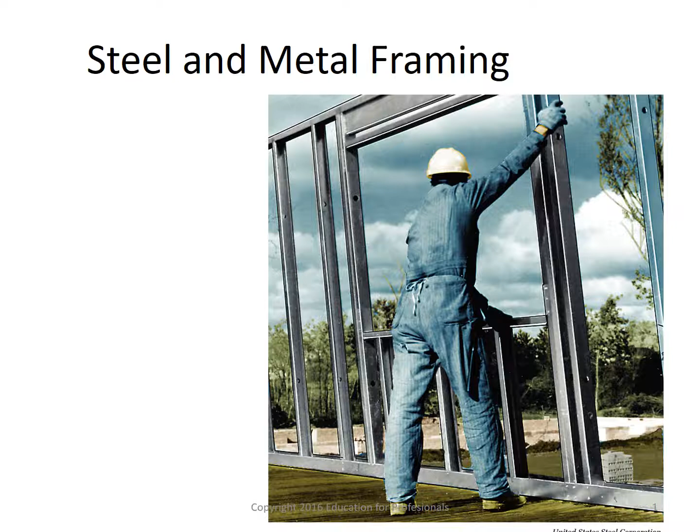Many metal framing methods are employed today. Light gauge steel construction is often called steel stick construction, since each wood framing member in a typical wood framed home assembly is replaced with a metal framing member. Another metal framing method, similar to light gauge steel construction, involves the use of heavier gauge and lighter gauge steel studs. The heavier gauge studs are placed 4 foot on center, with the lighter gauge members installed between the studs.

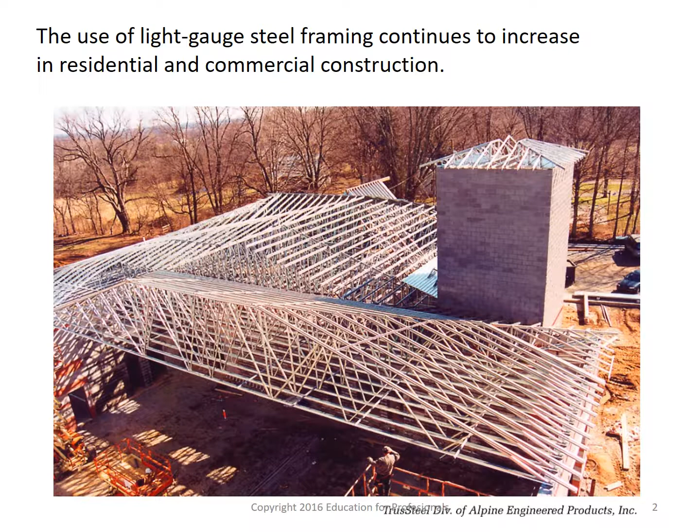The C-shape is the most common shape produced for light gauge steel framing and is used for studs and joists. C-shaped members consist of a web, flange, and a lip. Web depths range from 1 and 5/8 inches thick wall studs to 12 inches. The flanges stiffen the web and provide surfaces for attaching sheathing and gypsum board. The lips extend from the flanges on the open side and stiffen the flanges.

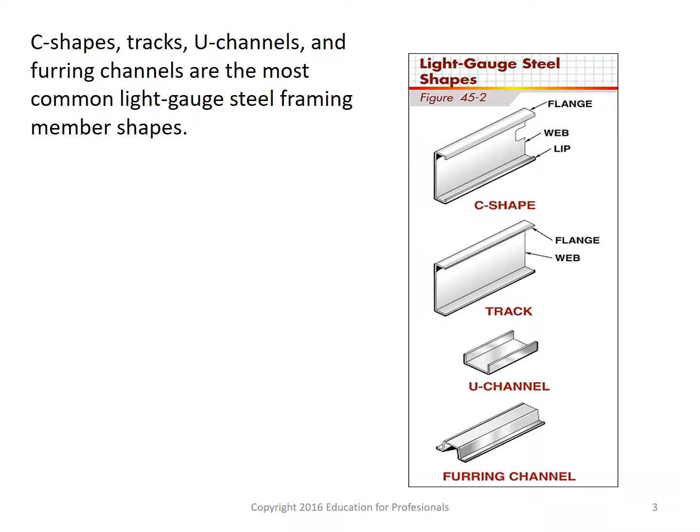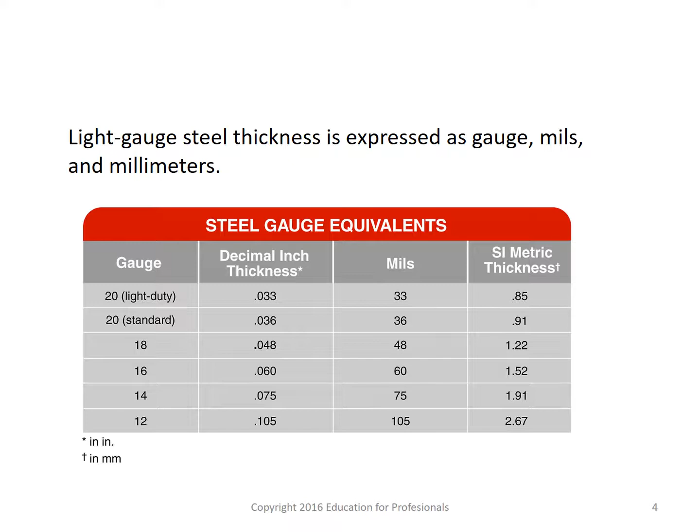The term gauge traditionally has been the unit of measure for identifying sheet steel thicknesses. The higher the gauge number, the thinner the steel. Steel thicknesses have also traditionally been given on prints as mils. A mil is equal to 1/1000th of an inch. Metric dimensions in millimeters are increasingly being used to express steel thickness. 1 millimeter is equal to 0.001 of a meter. The table in figure 45-3 provides gauge dimensions and their decimal, inch, mil, and SI metric equivalents.

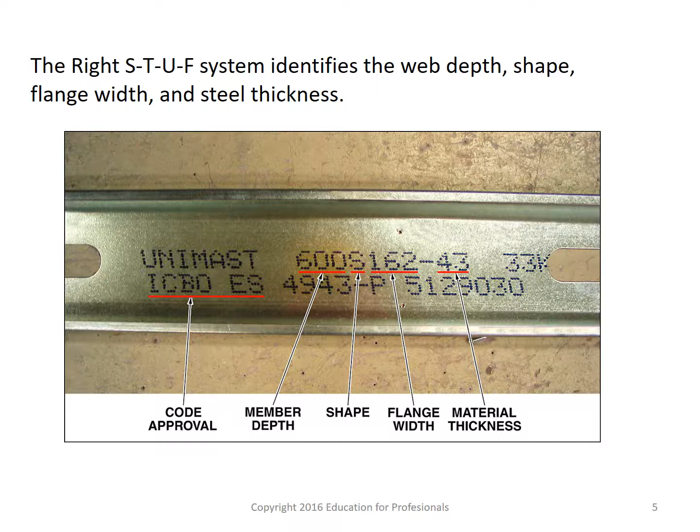When using the STUF system, the web depth and flange width are expressed in hundredths of an inch. For example, the web depth for a stud with a 6 inch depth is expressed as 600, since 6 inches times 100 equals 600. The flange width for a stud with a 1 5/8 inch flange is expressed as 162, since 1 5/8 equals 1.625 inches, and 1.62 times 100 equals 162. That's where they come up with the 162 number. So the steel thickness of a light gauge steel framing member is the thickness of the base metal in mils before being galvanized.

Self-tapping screws are used to fasten metal members to each other and to fasten other materials to framing members. As the name implies, self-tapping screws cut their own threads as they are being driven into the metal framing members. Self-tapping screws include self-drilling and self-piercing screws. The self-piercing type actually doesn't tap the same way as the self-drilling type.

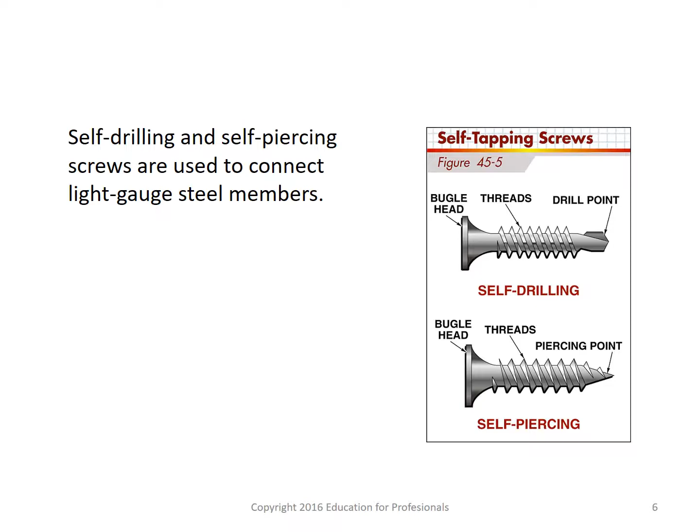A variety of screw head types are available for different operations. See figure 45-6 for the various different types. You have screws with pan heads, hex washer, or pancake heads, which are recommended for fastening steel to steel. There are a few common types that are predominantly in use, while some are lesser found. It depends—if the gauge of the metal is a thicker type, a lower gauge, then sometimes you have to use different types of screws.

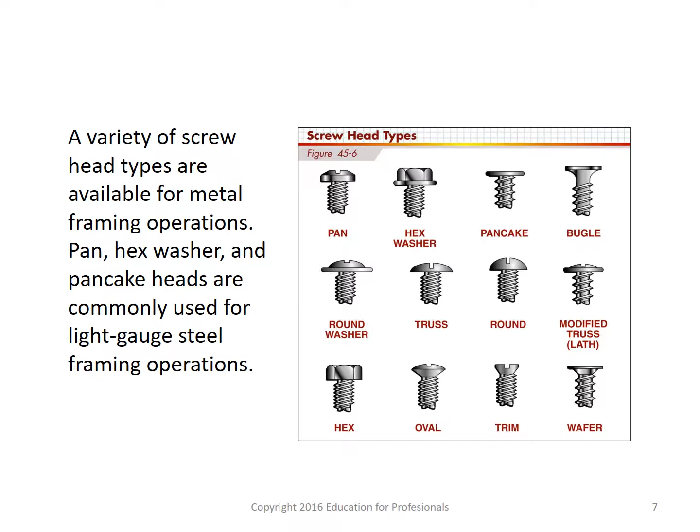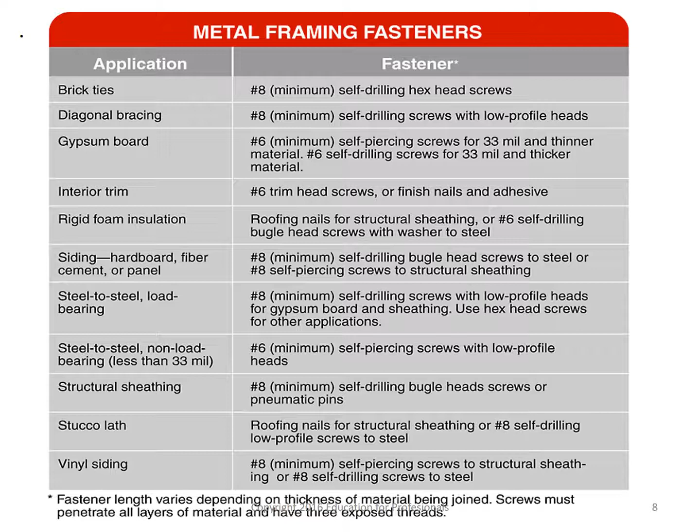Drive pins are made of heat-treated, high-carbon steel that produces a very hard fastener. Drive pins have spiral grooves or knurls on the shanks to draw the pins tight when driven. As the pin is driven, the point penetrates the sheathing and bores through the steel. This action pushes the steel outward away from the pin. The steel then compresses and grips the pin.

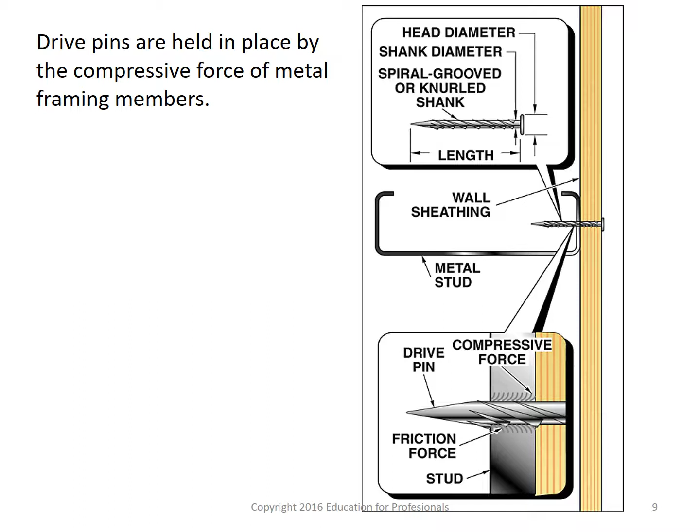Welding can be used to prefabricate wall sections as well. Most often, wall sections are welded in a shop rather than on the job site. Welding must be performed by certified welders and according to the American Iron and Steel Institute specifications, AISI.

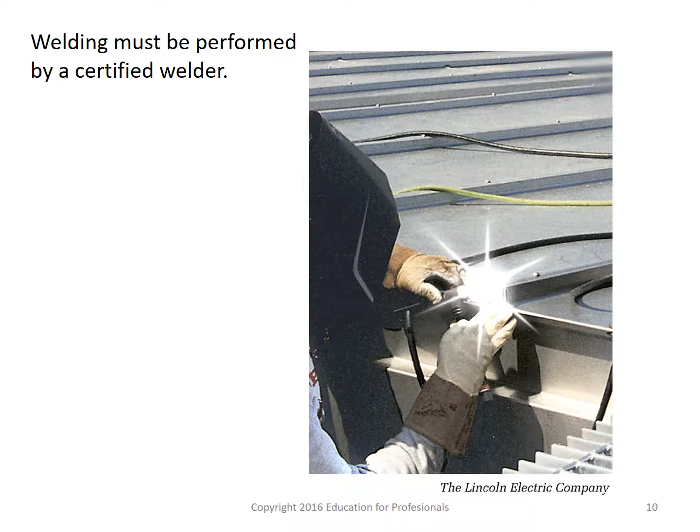Spot clinching is a method for joining two metal framing members that provides a strong connection without the use of mechanical fasteners. In the process, a pneumatic clincher presses a section of one framing member into the adjoining member, leaving a button or stitch indentation. Spot clinching is currently approved by the International Conference of Building Officials, but has yet to be approved by other code organizations.

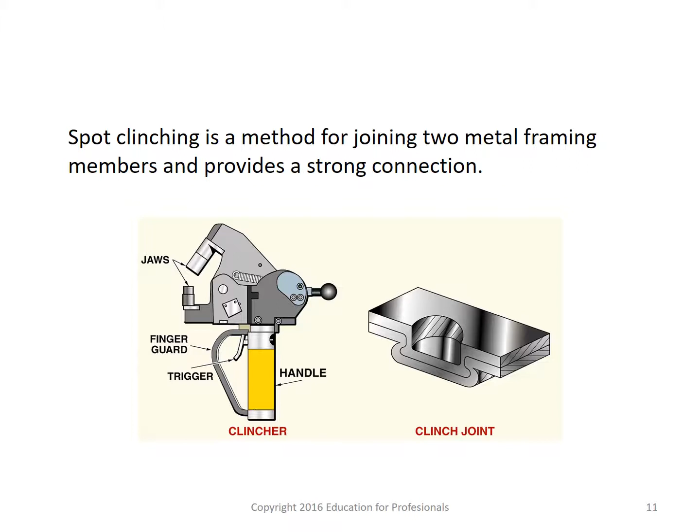A drywall screwdriver is often used to fasten metal framing members together and to fasten panel sheathing or gypsum board to metal framing members. The nose piece on the drywall screwdriver controls the depth to which the screw is driven and prevents screws from going through the panel or gypsum board.

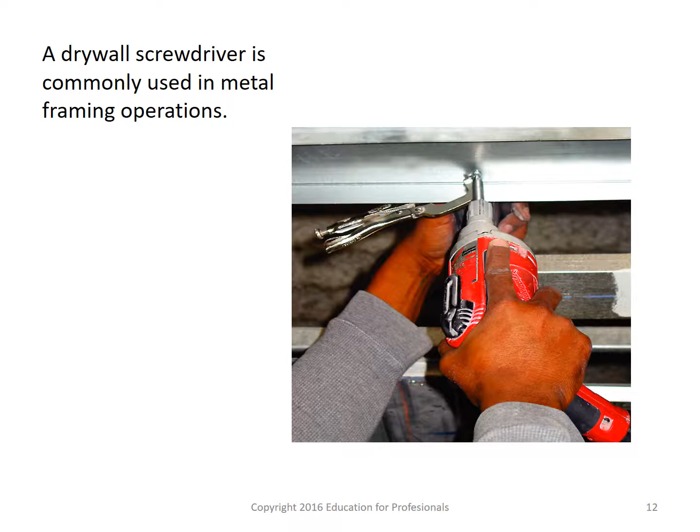Pneumatic steel framing tools, or pin guns, are used to install drive pins. They operate on air pressure ranging from 90 to 120 psi, and the pressure required depends on the steel thickness. These tools have a safety contact to prevent firing unless the trigger is pressed and the tool is firmly against a work surface. An overdrive control mechanism prevents overdriving of the pins. The air compressor line pressure must also be adjusted to the proper setting for the steel being fastened, as too low pressure will result in pin failure.

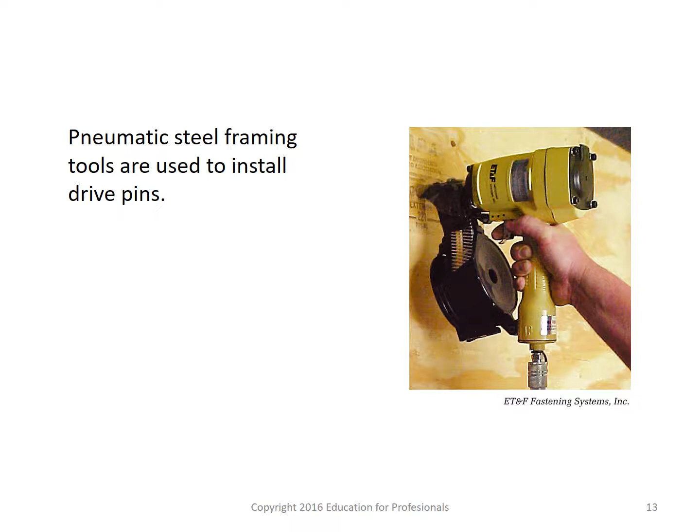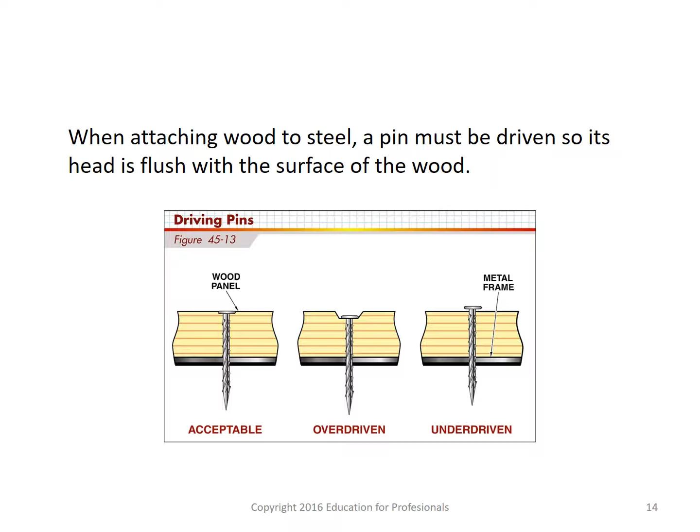A drive pin should be driven so its head is flush with the panel surface. As you see on the far left, that's good. Overdriven, too deep below the surface, weakens the bond, and underdriven has the same effect, also weakening the bond. It also leaves an amount exposed that can get in the way of other items.

An abrasive cutoff saw, or chop saw, is a power tool used to cut metal framing members. Unlike power miter saws, abrasive cutoff saw blades cannot be rotated from side to side for angle cuts. Instead, the saw fence is adjusted from side to side for angle cuts. An abrasive cutoff saw is equipped with an abrasive blade.

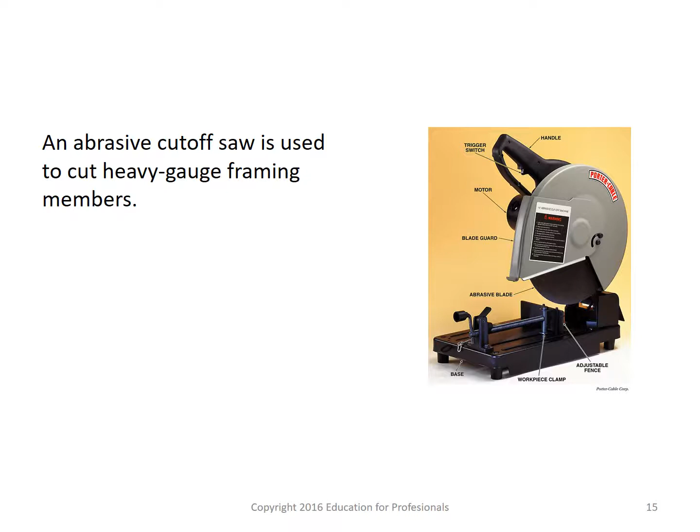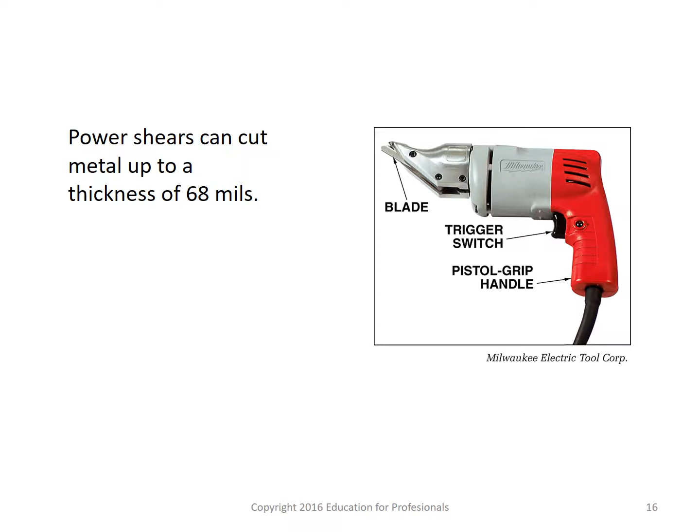These saws are used for heavier gauge steel studs, the commercial type, which are often too heavy a gauge to be cut even with hand snips. But there are other alternatives. Here's one: handheld power shears, which can cut metal generally up to about 68 mils.

Another method is plasma arc cutting, an electric arc cutting process in which metal is cut by melting a portion of it and blowing the molten metal away with a stream of heated, high-velocity ionized gas. Plasma cutting is used when a large number of metal framing members must be cut, usually done on a CNC type setup in a factory, for prefabrication methods.

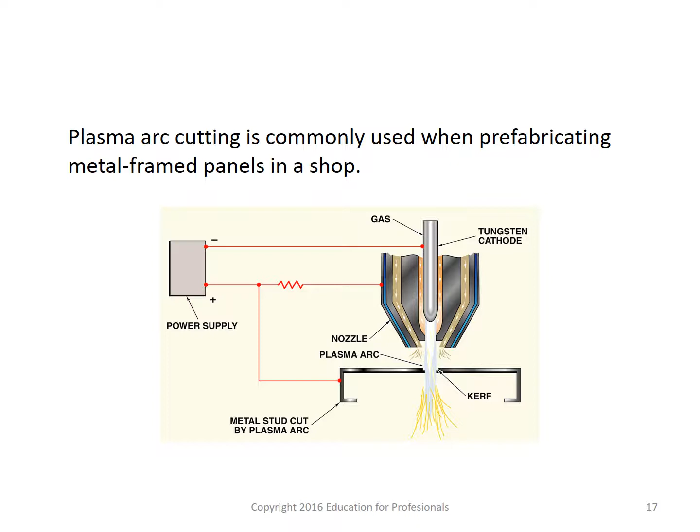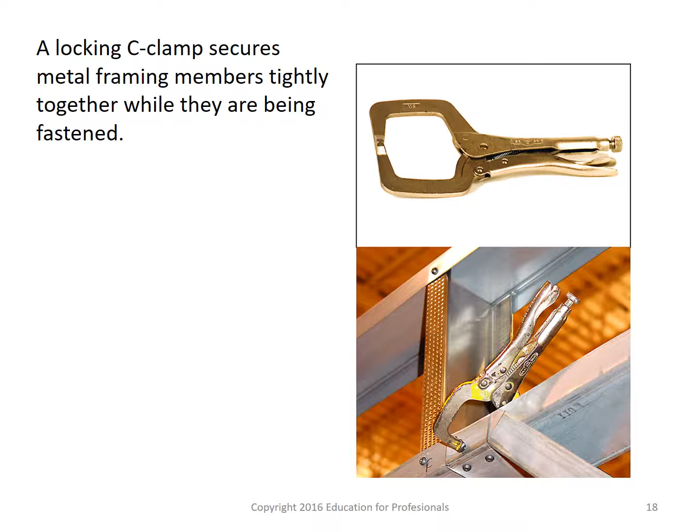Another common tool is the locking C-clamp, which secures metal framing members tightly together while they're being fastened. The metal can be a little slippery sitting in the C-channel track, especially studs, so when driving a screw between the track and the stud, it's much easier to put a C-clamp on and hold it tight so it doesn't move. It's also safer, because if you slip with a screw gun, it's easy to get hand damage, or even fall off a ladder given the force needed to drive that screw.

Load-bearing C-shaped steel joists are available in sizes comparable to wood joists, ranging from 2x6s to 2x14s. Metal stud framing is pretty much lockstep with wood framing as far as sizes go. Notice that first size, 1 5/8 — that would be the size. Say you're using a 1x2 for some reason; the actual size of a 1x2 is not 2 inches on that dimension, it's 1 5/8. The idea behind mirroring these dimensions is to keep everything consistent with wood construction.

Joist thicknesses and sizes are determined by the live and dead loads the floor must support over its unsupported span, the same as with wood, where span tables and charts are used for figuring allowable spans. Openings are provided in the webs for utilities such as electrical wiring or plumbing, meaning holes are cut to allow wiring through, similar to drilling floor joists or studs, but these openings are already there and quite handy. Floor joists should be positioned so openings are at least 12 inches from any bearing points, and the outer ends of the joists are attached by metal angles to a rim track, which serves the same purpose as a header joist in wood frame construction.

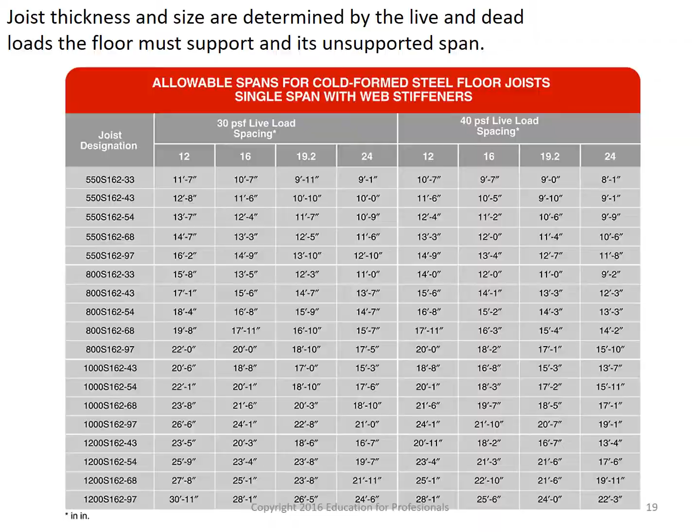Here, the main components of a metal frame floor are shown: the joists, the rim track, cross bridging, and blocking. These ensure framing components are installed in the same direction so that cutouts align to allow for easy installation of utilities. Keeping all those cutouts in a row is important. If you're running a straight pipe through this, you can't have those cutouts jogging to the left and right. The same goes for steel studs in a wall situation.

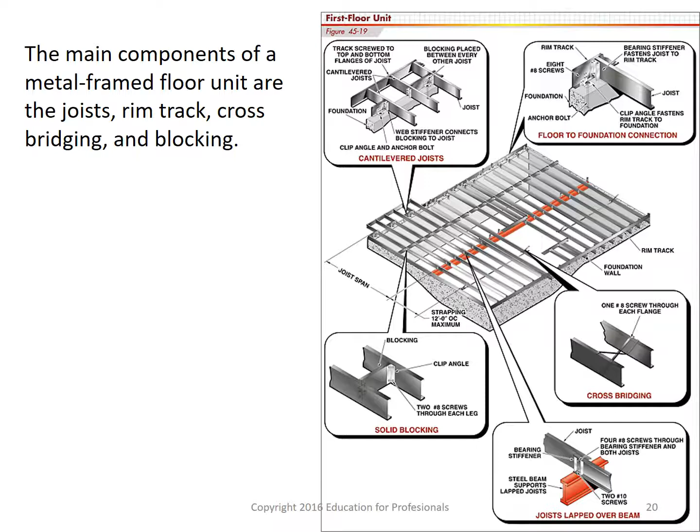This figure shows a framed floor unit over a full basement foundation, where the rim track is directly fastened to the foundation with clip angles. One part of the clip angle is secured to the foundation wall using an anchor bolt, and the other part is secured to the rim track with screws. Bearing stiffeners tie together the ends of the joists and the rim track.

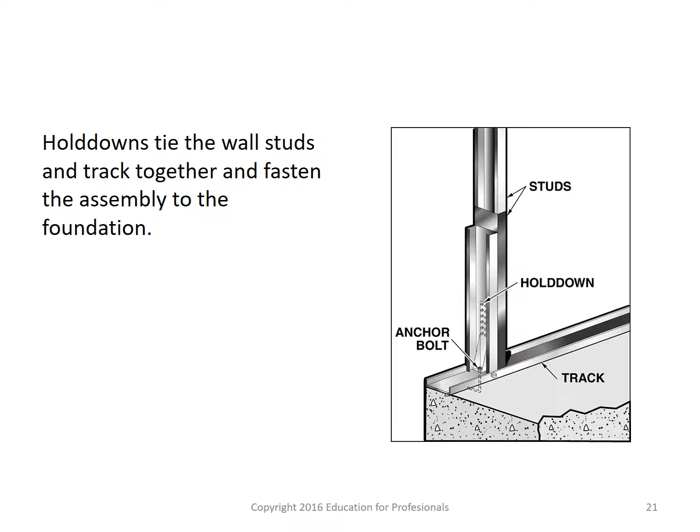In hurricane and seismic areas, hold downs may be required to tie down the wall studs and track together and fasten the assembly to the foundation.

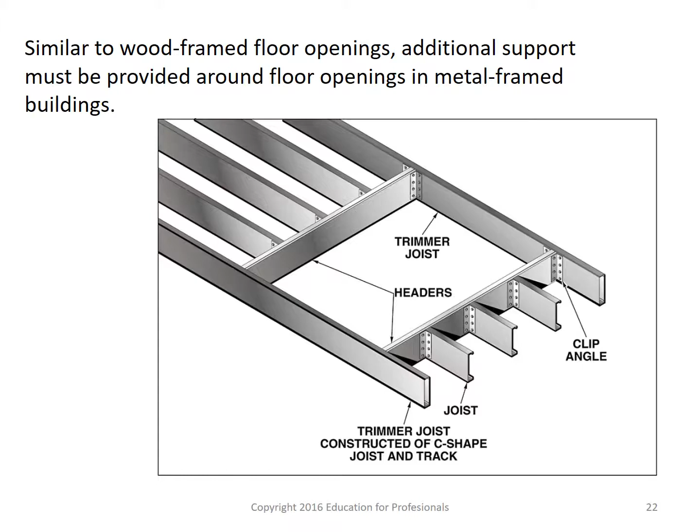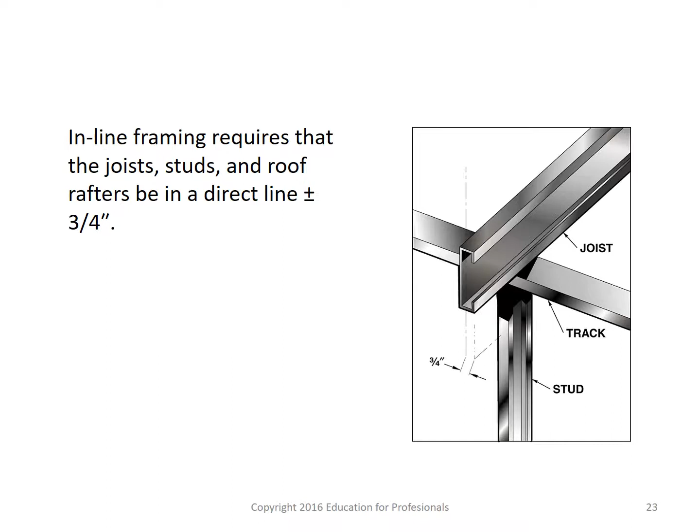A maximum variance of 3/4 inch on either side of the center line is allowed. However, unlike the double top plates of a wood frame building, the horizontal tracks of a metal frame wall cannot adequately support weight between the spans of the studs or joists. The metal framing is often lightweight enough that it's not meant to carry a joist if it was off the stud to the left or right by more than that 3/4 inch amount.

Top and bottom tracks are comparable to the top and bottom plates of wood frame construction, and the tracks consist of a web and two flanges. The web width of a track must be equal to the web width of the studs. Track flanges may be bent slightly inward to ensure a tight fit between the track and the studs. The studs are placed at an angle between the track flanges and turned so they are perpendicular to the track.

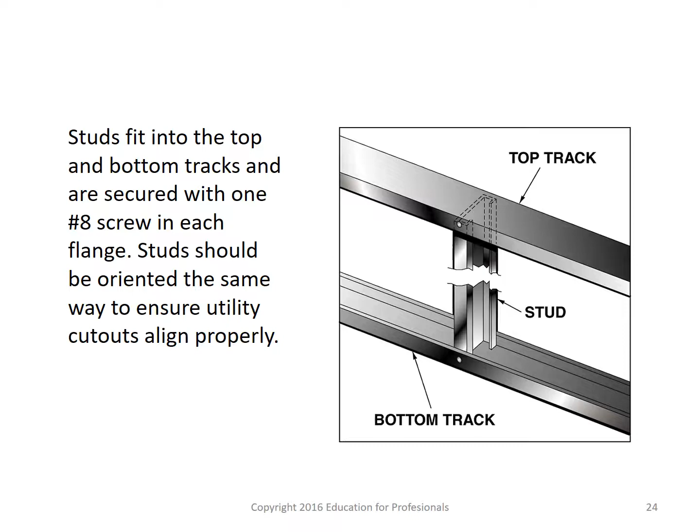Anchor bolts are commonly used to secure the bottom tracks of load-bearing exterior walls to concrete slabs or foundations. Bottom tracks must be reinforced with a washer, hold-down bracket, or plate to ensure a proper connection, since they're simply too thin. In the old days, we even used powder actuated fasteners, but a little bit of upward force and they just rip right through that metal bottom track—that's the reason for putting a washer as well.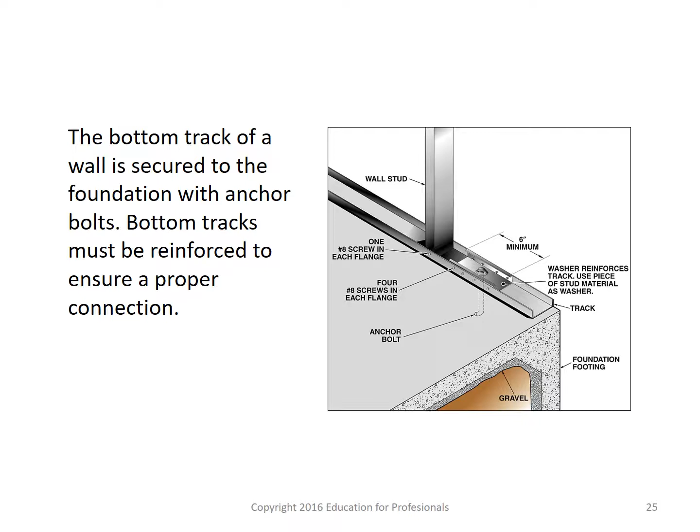Anchor strips and mushroom spikes may also be used to secure the bottom tracks in position. Powder actuated fasteners now should not be used to permanently anchor bottom plates to slabs or foundation walls, so that's pretty much out.

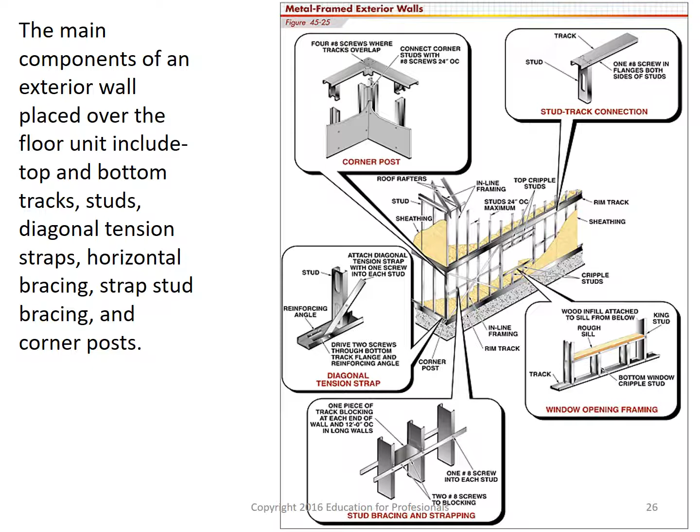A first floor exterior wall placed over the floor joist and subfloor is shown in this figure. Note the inline framing of the studs directly above the joists. The wall includes a window opening with a header, sill plate, and top and bottom window cripple studs. Diagonal braces or tension straps are used to brace studs against lateral movement. An outside corner post and stud-to-track connections are identified there. Exterior walls are sheathed with APA rated structural panels, OSB, or plywood.

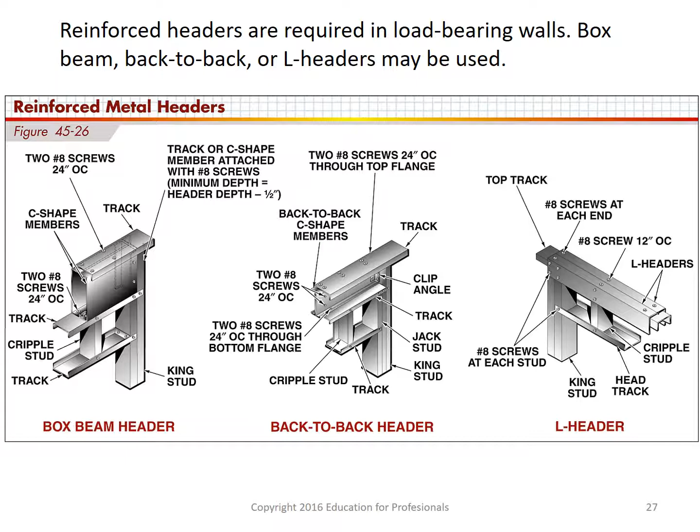Similar to wood frame construction, headers are installed above wall openings in exterior walls and interior load-bearing walls. Headers are formed with two equal-sized C-shaped framing members to make a box beam header or a back-to-back header, and may be constructed with one or two angle pieces that fit over the top track, which would be an L header. You can see in the drawings what a box beam looks like. The back-to-back header forms an I-beam, and the L header has track over the top and bottom. It's a little bit different.

Where a non-load-bearing wall intersects with a load-bearing wall, that's one type. There, a 6-inch or larger stud can be installed in the exterior wall, and the smaller stud is fastened back-to-back with the larger stud. Another method, similar to constructing inside corners for wood frame buildings, involves fastening two equal-sized studs back-to-back. Either of these applications are acceptable.

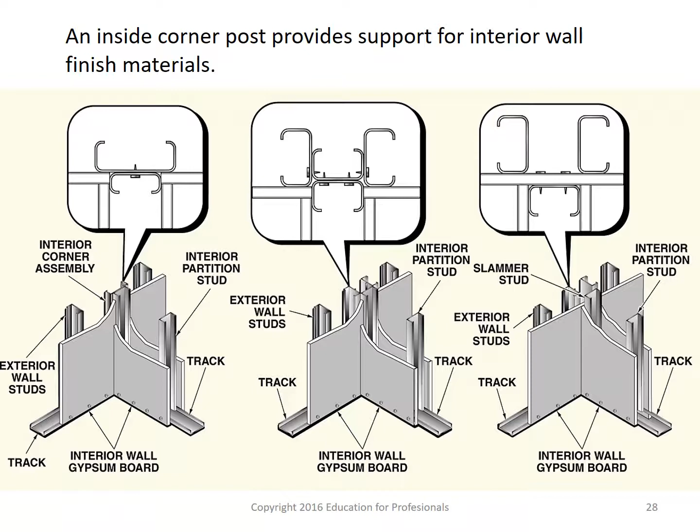Wall studs can be pre-cut to the proper length and delivered to the job site, or they can be cut on the job site with a chop saw.

The walls are framed on the subfloor or a separate panel table. A common wall framing procedure is as follows: lay out the walls on the subfloor or panel table in snap lines, cut the bottom and top tracks where it is necessary to splice them, insert a short piece of stud material and fasten to the tracks as shown in the figure. Position the tracks on edge next to each other and use a black felt tip marker to lay out the studs, usually 24 inches or 16 inches on center, marking the tracks using standard conventions.

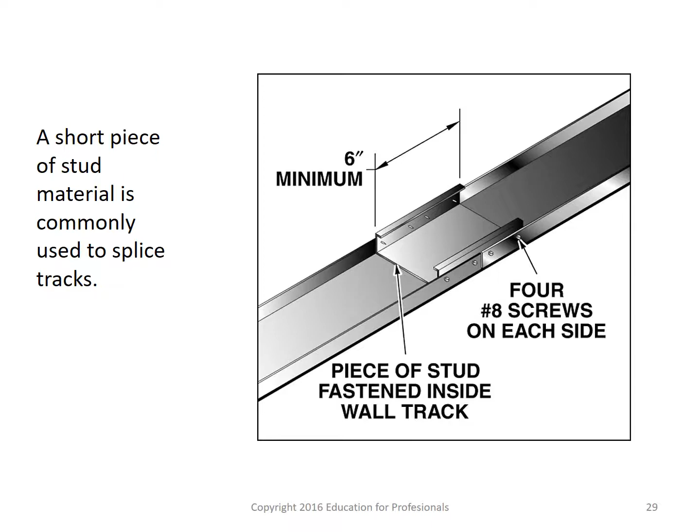A common procedure for raising and placing walls is this: measure the locations of foundation anchor bolts, transfer the measurements to the bottom tracks, and drill holes so the tracks fit over the bolts. Here you can see the other procedure is simply raising the wall into position and then placing it over the anchor bolts.

You should attach braces to the ends of the walls, about every 8 to 12 feet between the ends. Studs about 12 feet long work pretty well for braces. That's an angled brace that goes to the subfloor, if it's a wooden floor, and to the wall itself at the top near the headers. Nail wood blocks to the surface subfloor in a wooden situation.

For the concrete ones, we usually used a powder actuated tool, or else you could just bolt them down with an expanding bolt. The powder actuated tool can be a little iffy since high winds can rip them out, so you want to make sure the walls are anchored pretty well. Obviously, you don't want the walls toppling over due to some wind.

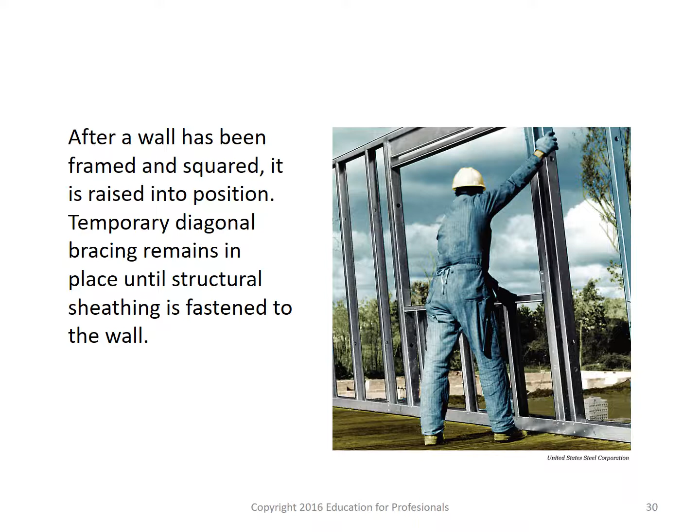For a multi-story building, the ceiling joists also serve as floor joists. The framing procedure, fasteners, and components are the same as those used for first floor joists. Ceiling joist bracing is fastened to the bottom of the joist where spans exceed 12 feet 0 inches.

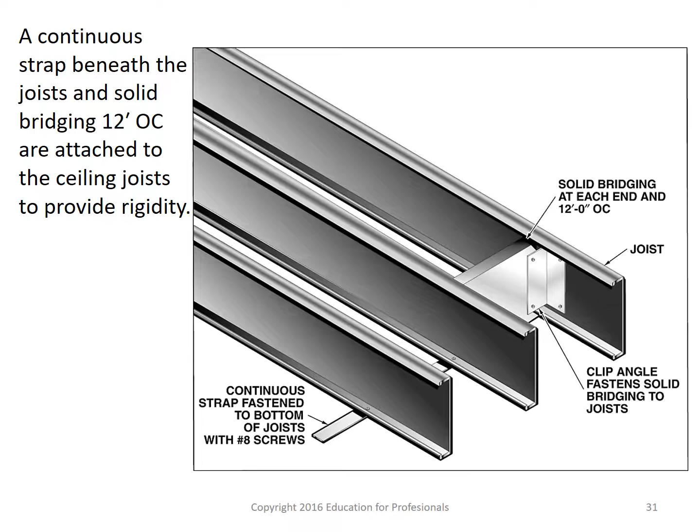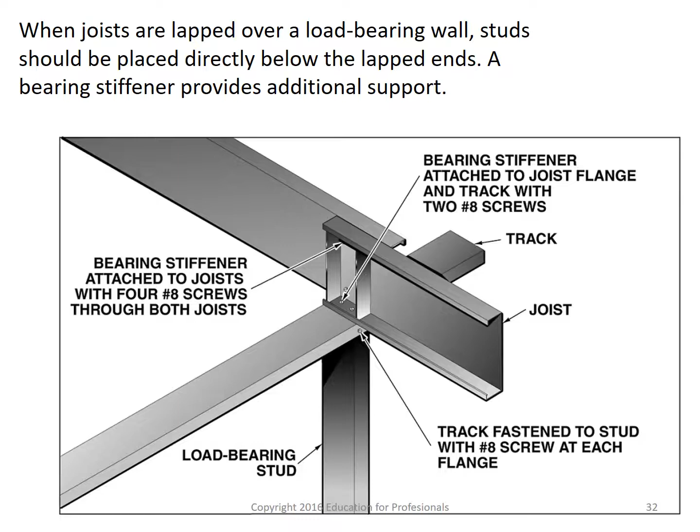Ceiling joists must be placed directly above and in line with the studs below. When joists are lapped over an interior load-bearing wall, the first floor wall studs will be directly under one of the lapped ends—take a look here in the figure. A bearing stiffener is used to secure the lapped ends in position.

For continuous span joists supported by a load-bearing wall, blocking is used at the midpoint, and the stud should be placed directly underneath. Where walls below run parallel with the ceiling joists, blocking is placed between the joists at a minimum of 48 inches on center to provide anchorage for fastening the top of the walls to the ceiling.

So here you are running a wall where you really would have an open space, and quite often that bridging is just a flattened out C channel made on site there. You just do it with a hammer, flatten the ends, and screw it to the joist. It leaves a little bit of rigidity to this type of bracing or blocking. Remember, blocking is just like in wood—it's fabricated on site, made from scraps. Same idea in metal framing, but this is how it's done in this type of situation, as far as attaching the top wall, the top track to something.

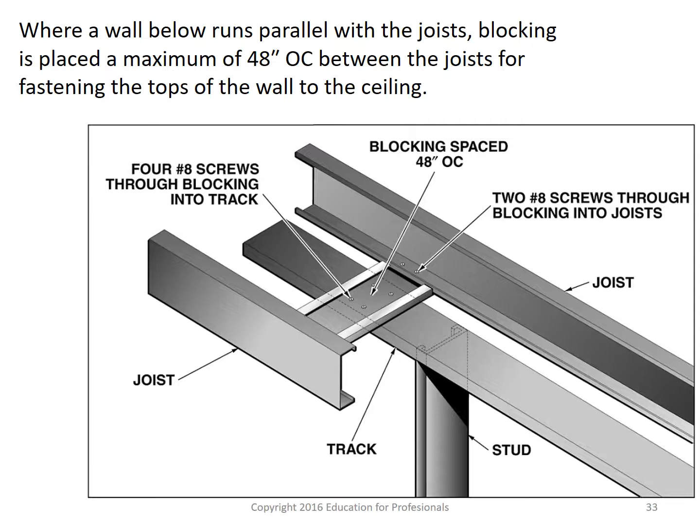The rafter support braces and rafters are stiffened by lateral braces. Lateral support braces for rafter support bracing are C-shaped or track members, spaced 4 foot on center. Lateral support braces for rafters are fastened to the bottom flange of the rafters and could be flat strips, C-shaped members, or track members.

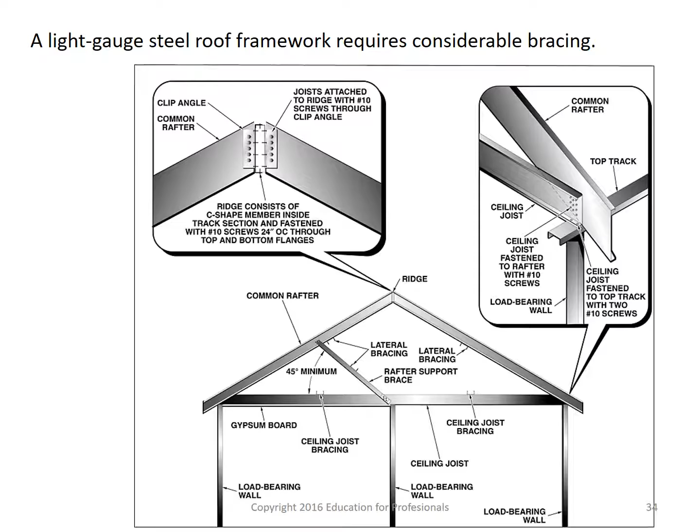Metal roof trusses are frequently used to construct roofs over metal frame buildings, and you can see that here. The design shapes and engineering principles of metal roofs are similar to wood trusses, and the temporary and permanent bracing methods for metal trusses are similar as well—while you're putting up the trusses, temporary bracing keeps them from being knocked over by the wind. If you want to look at truss placement methods for metal studs, it's harder to find, but you could use the wooden truss placement guides as a rule of thumb.

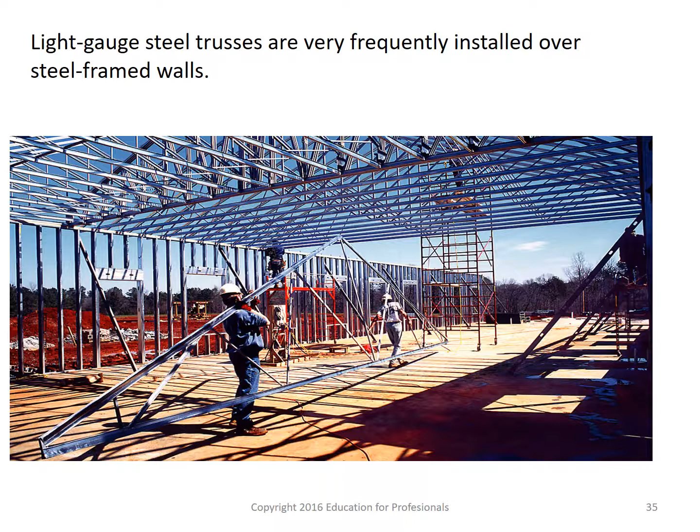Metal roof trusses can be constructed on the job site, but mostly the trusses are prefabricated in a shop, same as wooden trusses. It makes it easier and saves work on the job site. They're done here in jigs and templates where each one comes out almost perfect compared to the other.

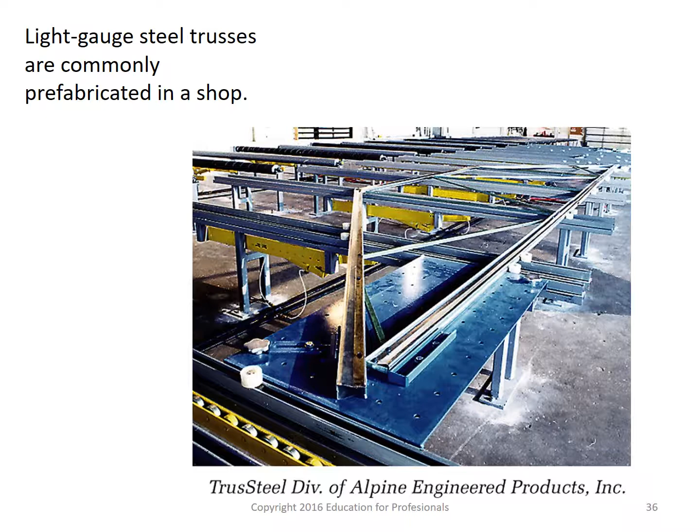The trusses are constructed here on a level surface, such as the shop floor, subfloor, tables, or elevated jigs. Manufacturers design the entire roof structure and furnish shop drawings and specifications to a general contractor. They work as a separate unit, kind of like how you get your windows and doors—you obviously don't fabricate much of that on site anymore. So it comes as a component already done for you.

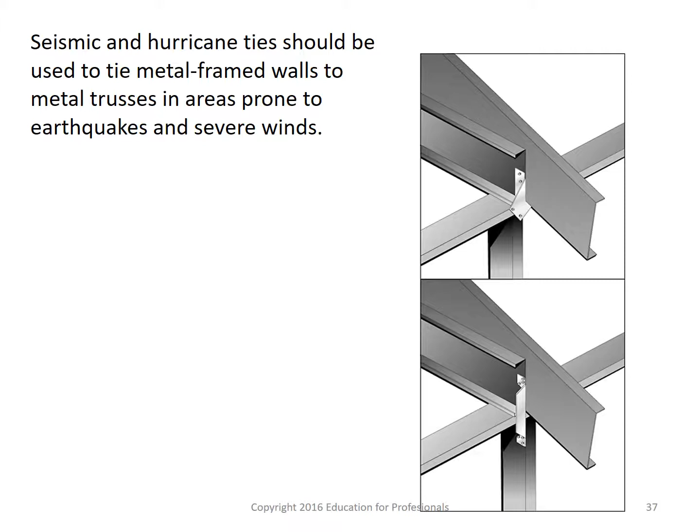Here are some seismic and hurricane ties that should be used with metal rafters and trusses, obviously in areas prone to earthquakes and severe winds. Most codes are showing that you have to have these in all areas. This figure shows the metal connectors that are used to tie metal framing walls to framed roofs, and again, they look a lot like the wooden type hurricane straps—just a twisted strap so you can connect in both directions.

Structural steel framing is on the increase for residential and light commercial buildings—you see it going up all over. It's also referred to as red iron steel framing because of the characteristic color of the framing members, which comes from the primer placed on them. It involves the use of bolted or welded connectors to form the framework of a structure, and the framing members are painted with that durable red oxide primer that resists corrosion. The manufacturer is usually specced to do that; it's part of a lot of the codes that these metals have to be pre-primed before arriving to a job site.

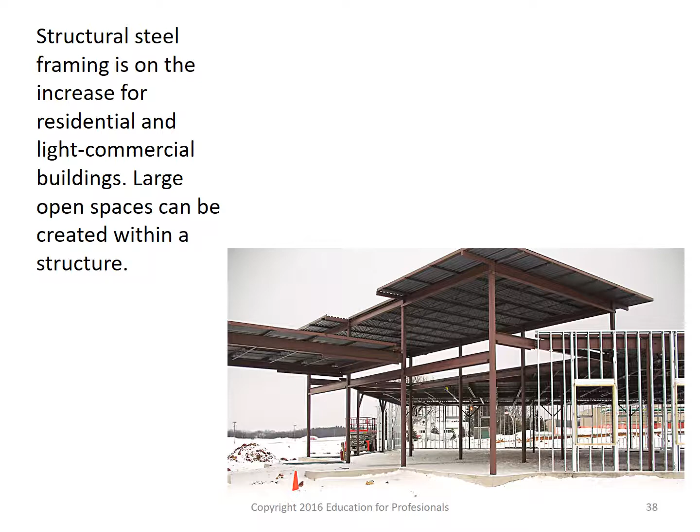The use of structural steel framing is increasing in residential and light commercial buildings up to only 2 stories in height, so you're beginning to see steel members like this used in residential as well. Depending on the size or type of the framing members, structural steel framing members may be joined on the ground or at the job site and erected using a crane, or the framing components may be erected individually and joined together.

Assemblies or individual structural steel framing members are erected using a crane or other hoisting equipment because of their weight. They weigh a lot more than the light gauge steel we looked at previously. Columns are fastened to the foundation or concrete slab using anchor bolts. This is all anchor bolt type work.

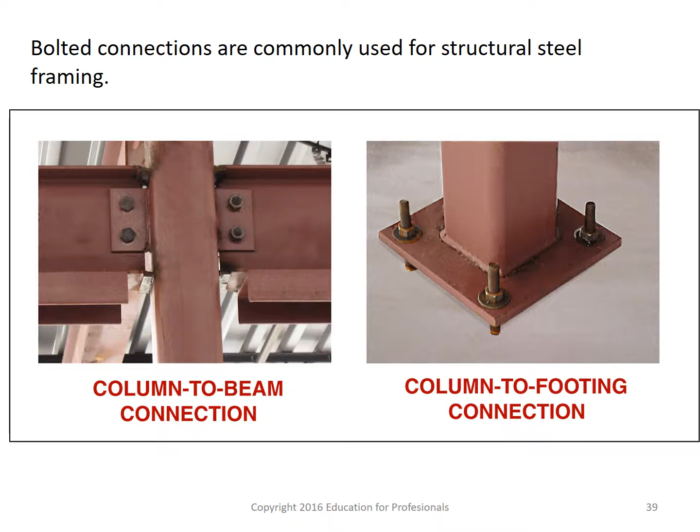The assemblies and individual framing members are joined using bolts or welding on site. They can either be bolted in place, like on the left, or welded in that same situation. Due to the size of structural steel framing members, large open spaces can now be created within a building, offering greater flexibility in room layout.

Structural steel framing members are commonly spaced 8 foot 0 inches on center, and light-gauge steel framing members placed 16 inches to 24 inches on center are used to fill in the spaces between the structural steel members, as you see here in the figure.

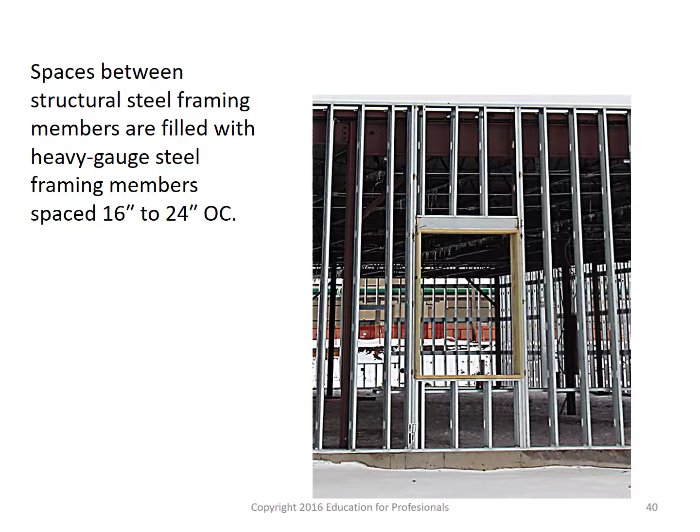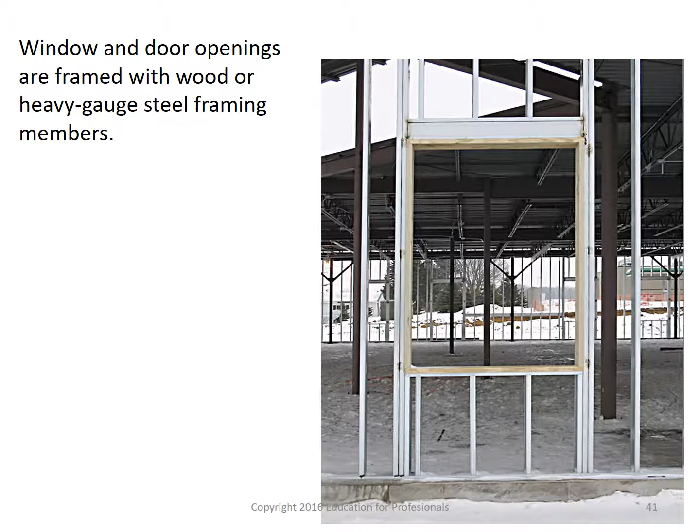Windows and door openings are framed with wood or heavy gauge steel framing members. A lot of times the wood is there to make it easy to receive the window, to screw into the wood. It seems to make a better subframe, or a subsurface that's a lot easier to adhere to. So here we see oriented strand board.

This is placed on the metal studs, same as wood studs, and the screws or drive pins are installed 3/8 inches from the panel edge and typically spaced 6 inches along the edge and 12 inches on center at intermediate studs. You can find that right in the code books as far as all the fastener schedules.

These are important to follow because they add support to the structure. They're really critical in metal framing, which tends to be a little more flimsy than wood framing. This gives increased strength, obtained by also applying a continuous bead of construction adhesive along the studs and rafters before fastening the panels in place, just to give a bit more strength to the whole assembly.

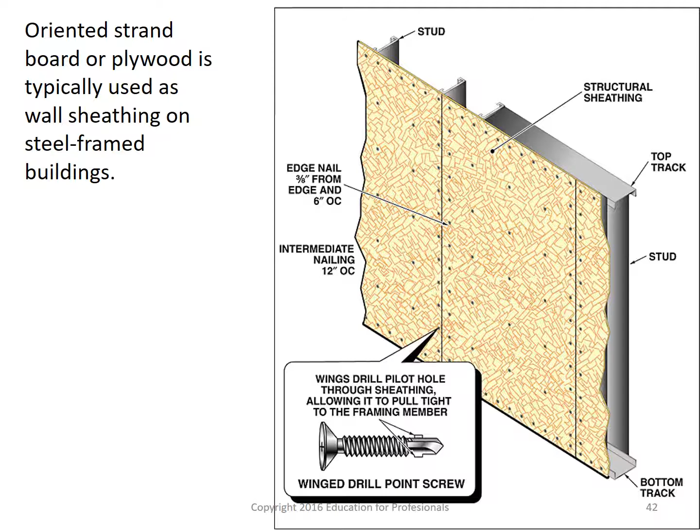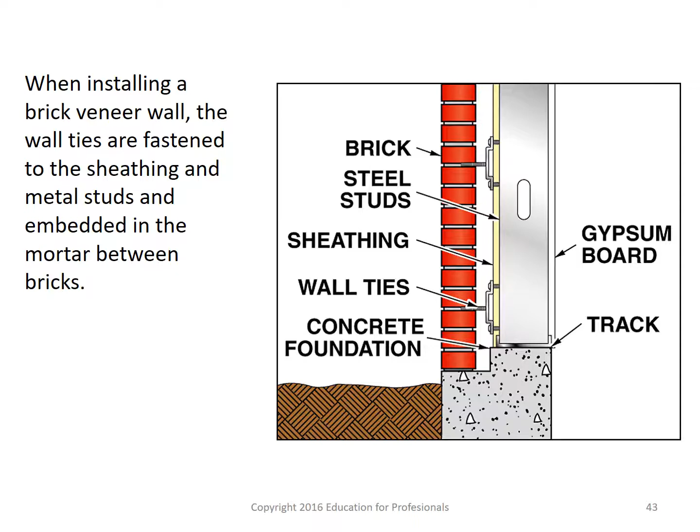When masonry is used as exterior finish, wall ties are fastened to the studs and embedded between the masonry courses. Several wall tie designs are now available -- that's something we'll look at in the masonry learning modules. But just to give an idea, they can be attached to the metal studs as well.

So finally we're getting to the end here, where you see exterior finish and exterior insulation and finish systems, which are common as exterior finish on metal frame buildings. One of the biggest advantages of using an EIFS -- exterior insulation and finish system -- with metal frame buildings is the elimination of cold bridging.

Cold bridging occurs when construction components, usually structural members or door or window frames, have greater thermal conductivity than the rest of the building, and they extend from the interior face to the exterior face of the building. Think of that as the interior face of the window and the exterior face of the window frame, both sides of the frame -- that's called a thermal bridge.

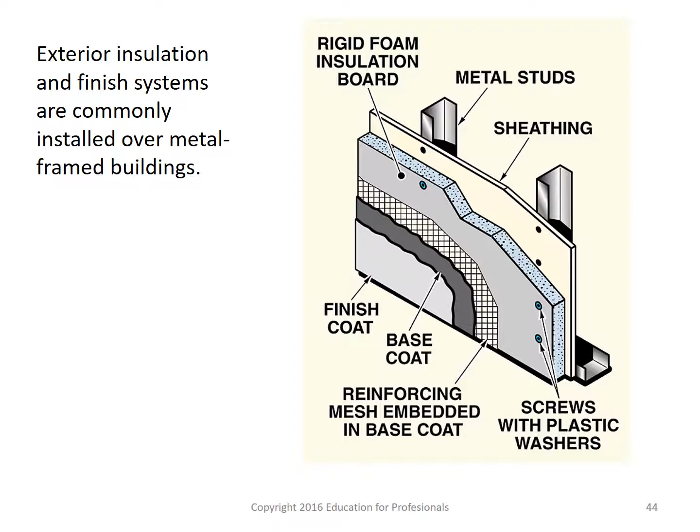Since our structural members do not extend across the faces, cold bridging in EIFS construction is eliminated because you have this continuous foam running across. In addition, there are no fasteners contacting the exterior that would transfer the cold to the interior of the building. This also makes a very good insulation system by using these metal studs with exterior sheathing and a rigid foam insulation board over it.

Insulation for metal steel frame buildings can be rigid foam or fiberglass blankets, or even a combination of both. Mostly today, to achieve the new recommendations for insulation, especially in energy efficient areas like Florida, you're going to have to use continuous insulation on the exterior anyway.

So the outside cladded insulation, a foam board over your structural panel, because the numbers are odd -- more like achieving R20 or R21 instead of R19 for walls. You can't go out and buy an R21 batt that would fill the cavity, so you're pretty much stuck having to put something of an R2 value outside the building, and that's why they've done that. It also helps provide that continuous insulation.

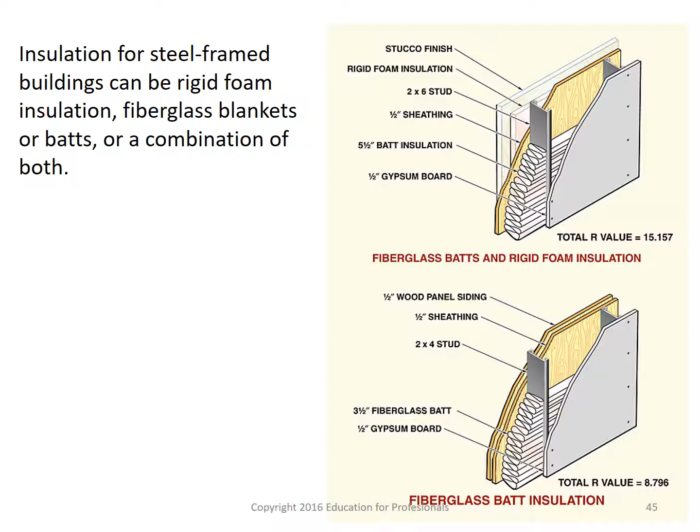So that's the idea, and with that exterior bit there, we're going to conclude the presentation here on metal building. Thank you.